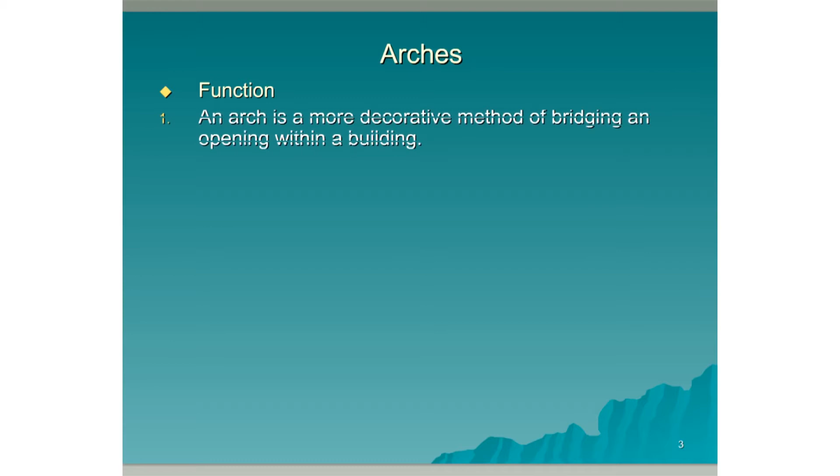Arches. What is the function of an arch? An arch is a more decorative method of bridging an opening within a building. Its function is also to support the weight above it and to visually enhance the appearance of the building.

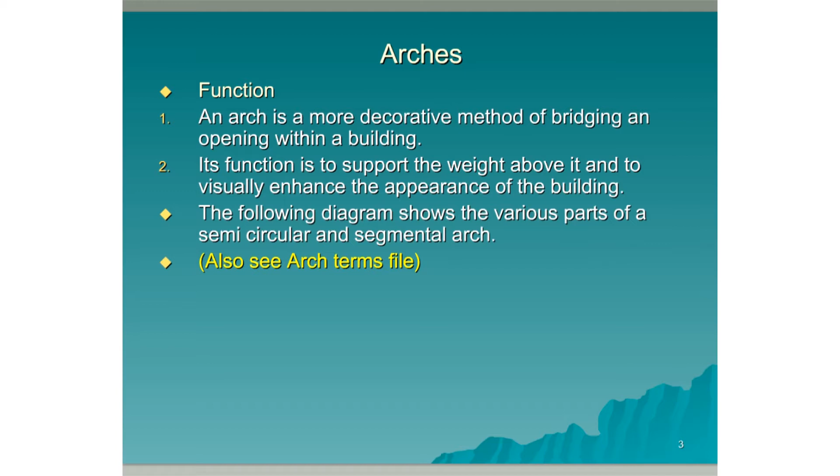The following diagram shows the various parts of a semicircular and segmental arch. Also see the arch terms file, which will help you learn all of the 17 arch terms and their definitions. The things that all arches have in common are the parts that make up the arch. These are called the arch terms. No matter what arch we're talking about, the terms stay the same. Now I'm going to talk you through the 17 arch terms.

A is the skew back. It is the sloping surface against which the springers of some arches rest. B is the key brick, the central brick in the arch face, always placed last. C is the springing line, a horizontal line drawn between the 2 springing points. D is the striking or summering point, the centre point of the circle of which the curve of the arch is a part.

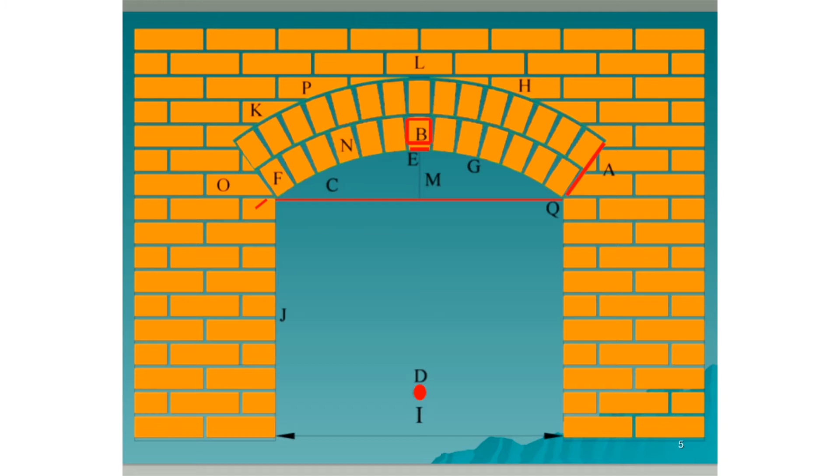E is the soffit, the underside of the arch. F are the springers, the lowest voussoirs on either side of the arch. G is the intrados, the inner or bottom curve of the arch. H is the extrados, the external or top curve of the arch.

I is the span of the arch, the distance between the 2 abutments. J are the abutments, the brickwork on either side supporting the arch. K is the haunch, the lower third of the arch. L is the crown, the highest point on the extrados. M is the rise, the vertical distance between the springing line and the soffit of the arch.

N are the voussoirs, the bricks that make up the arch. O is the face depth, the dimension between the extrados and the intrados. P are the creepers, the cut bricks around the extrados. Q is the springing point, the lowest point where the curve begins.

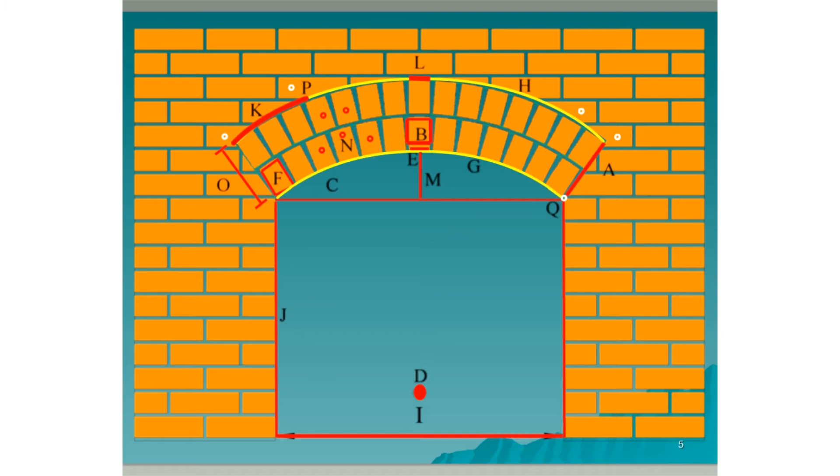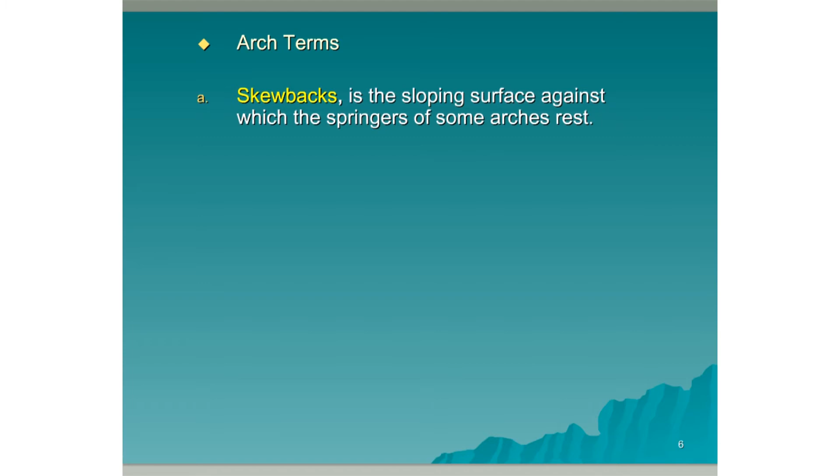Now I'm going to read through the arch terms again. A. Skew back is the sloping surface against which the springers of some arches rest. B. The key brick, the central brick in the arch face, always placed last. C. Springing line, a horizontal line drawn between the 2 springing points. D. Striking or summering point, the centre point of the circle of which the curve of the arch is a part.

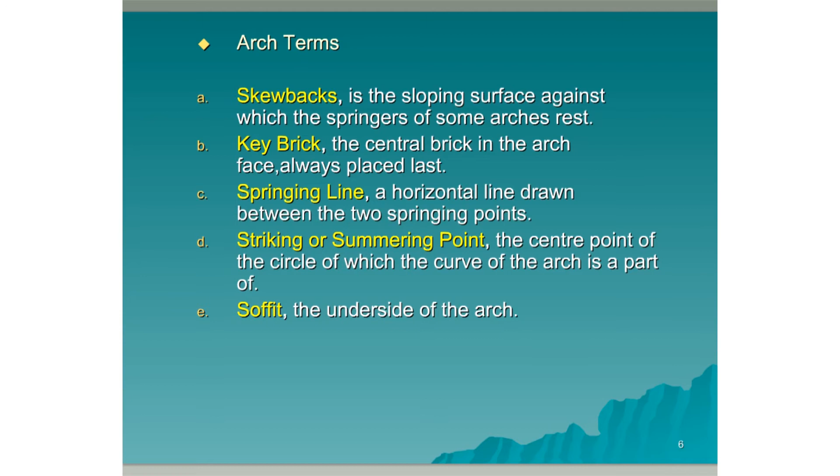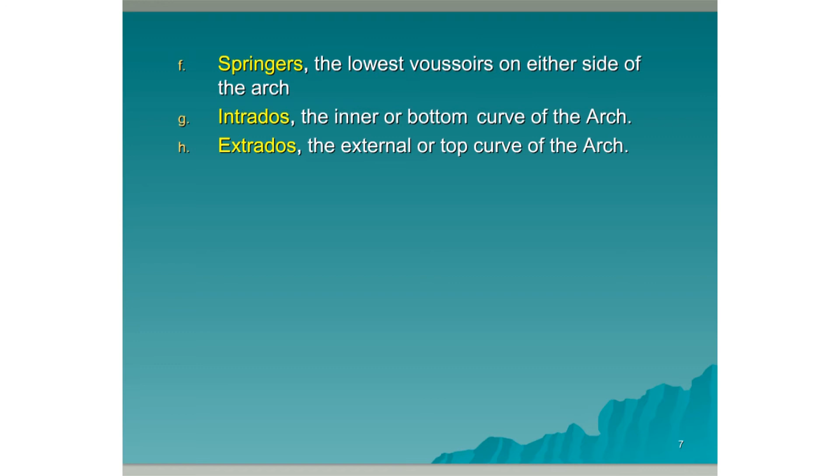E. The soffit, the underside of the arch. F. The springers, the lowest voussoirs on either side of the arch. G. The intrados, the inner or bottom curve of the arch. H is the extrados, the external or top curve of the arch. I is the span, the distance between the abutments.

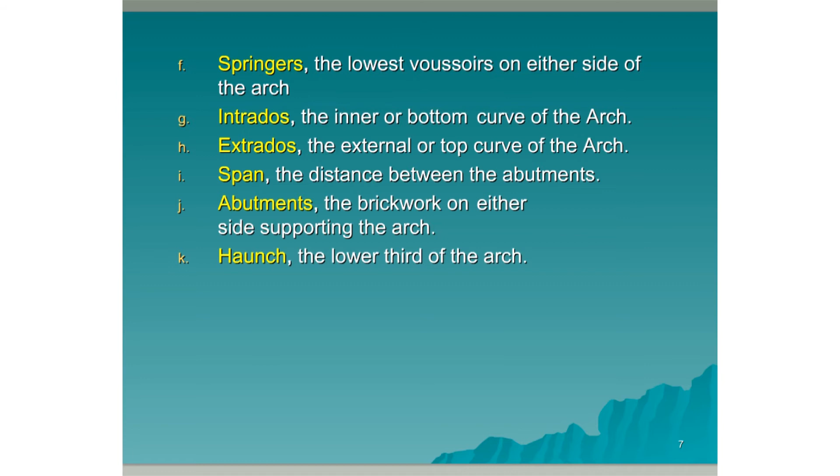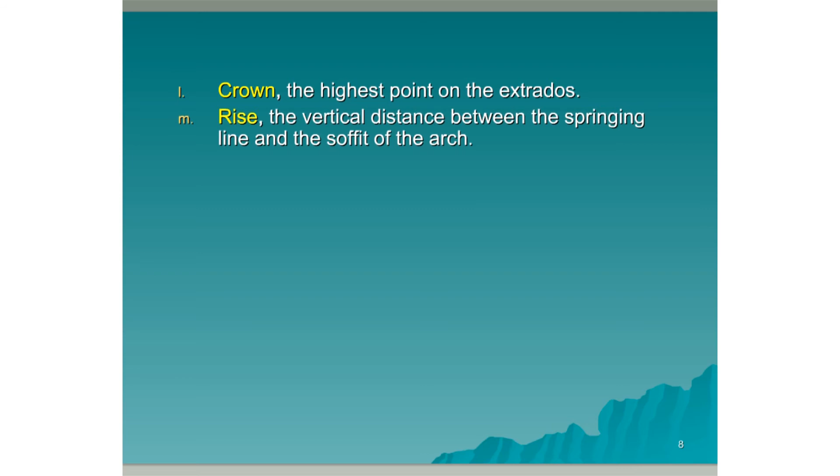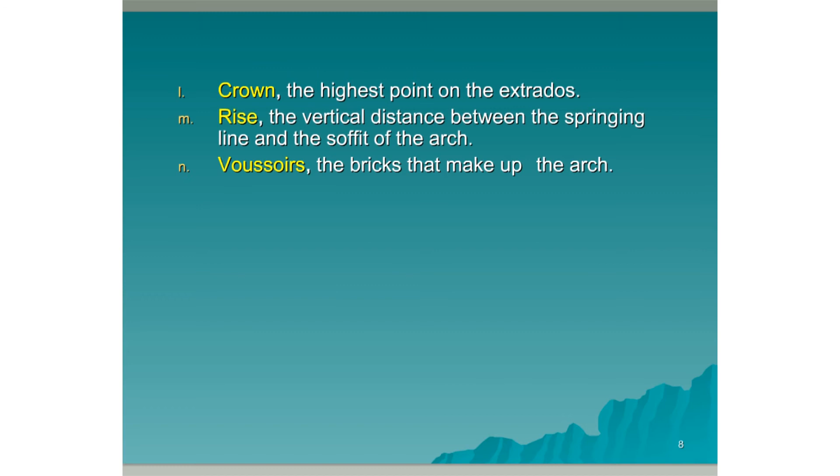J are the abutments, the brickwork on either side supporting the arch. K is the haunch, the lower third of the arch. L is the crown, the highest point on the extrados. M is the rise, the vertical distance between the springing line and the soffit of the arch. N are the voussoirs, the bricks that make up the arch. O is the face depth, the dimension between the extrados and the intrados.

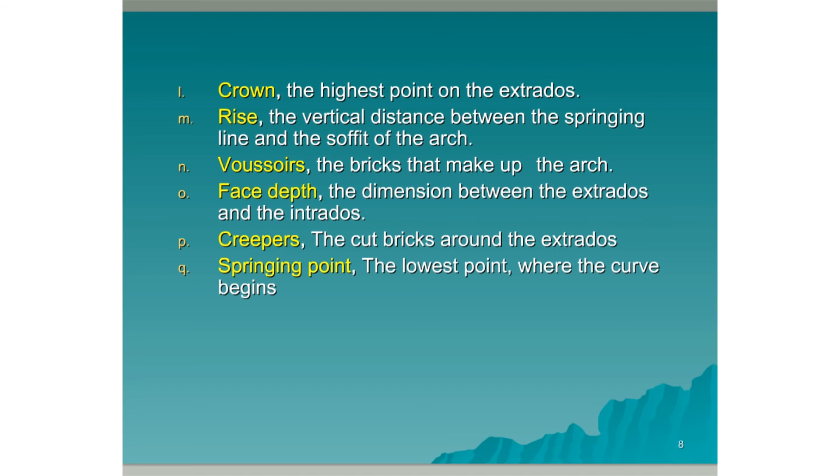P are the creepers, the cut bricks around the extrados. Q is the springing point, the lowest point where the curve of the arch begins.

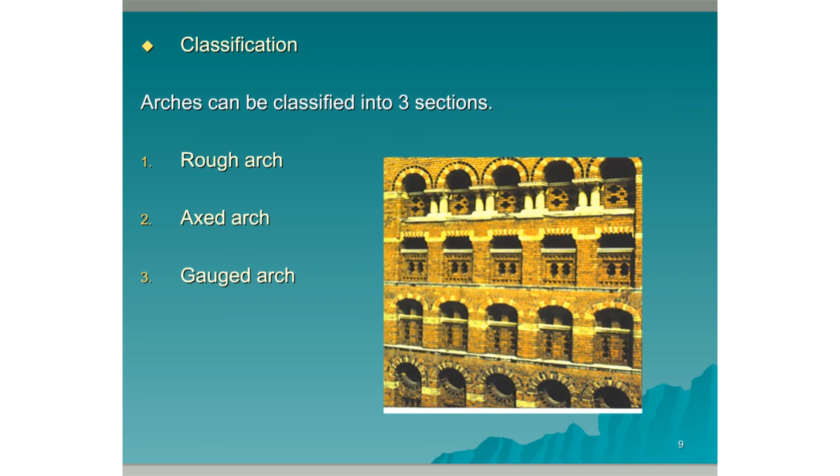Classification. Arches can be classified into 3 sections: rough arch, axed arch, and gauged arch. Rough arch: these are arches constructed from uncut bricks. It usually has 2 or more rings, and the curve of the arch is obtained by wedge shaping or V-shaping the joints. The thin end of the joint is at the intrados end. There must be an odd number of bricks in the first ring of this arch to allow for a key brick.

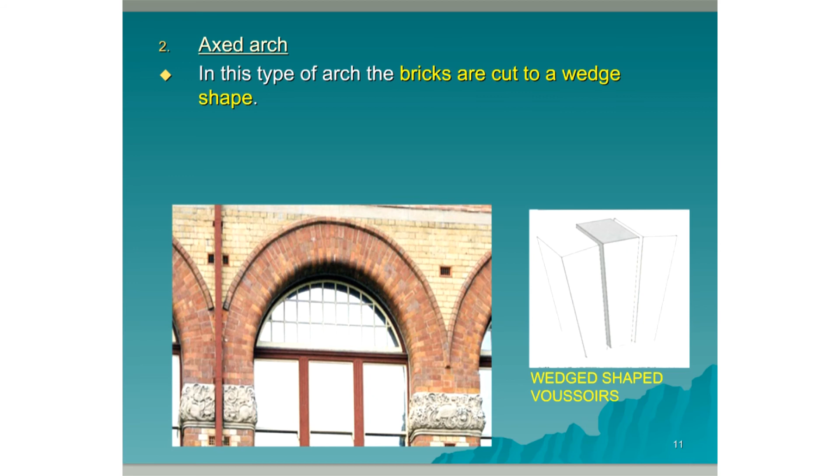Axed arch. In this type of arch, the bricks are cut to a wedge shape. The joints are kept parallel and are approximately 8 to 10 millimeters in size. There must be a key brick in this arch.

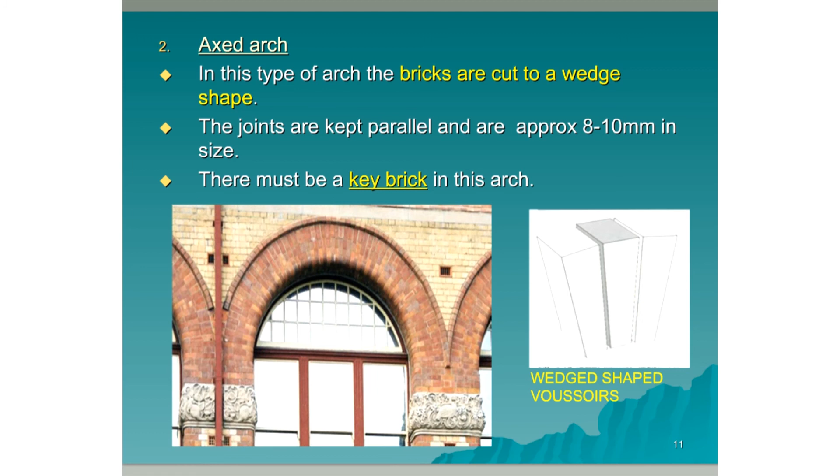Gauged arch. In this type of arch, the bricks are also cut to a wedge shape, but then they are rubbed or filed to the exact shape with a Carborundum stone. Carborundum stones are made from silicon and carbon. The voussoirs are then set in a lime putty with joints of 3 millimeters. There must be a key brick in this arch.

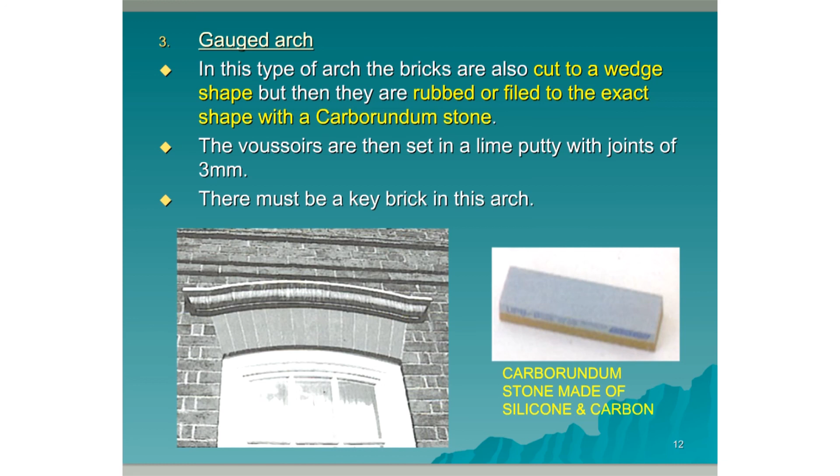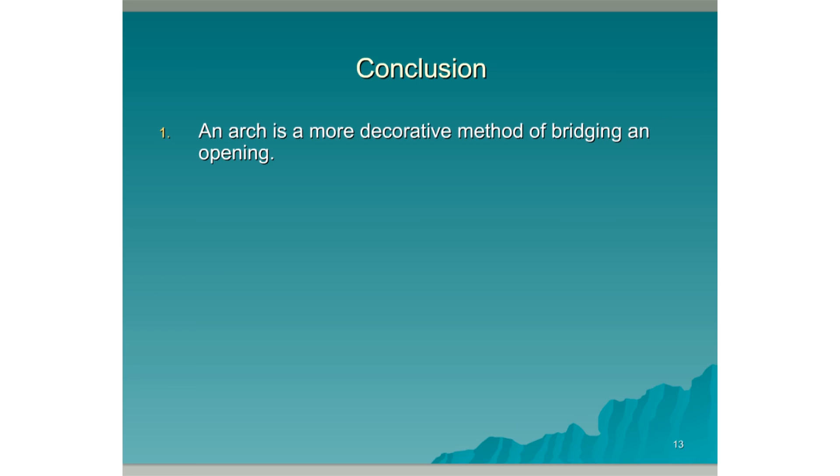Conclusion. An arch is a more decorative method of bridging an opening. There are 17 arch terms and you must know all of them. See the arch terms file to help you learn all of the arch terms and their definitions.

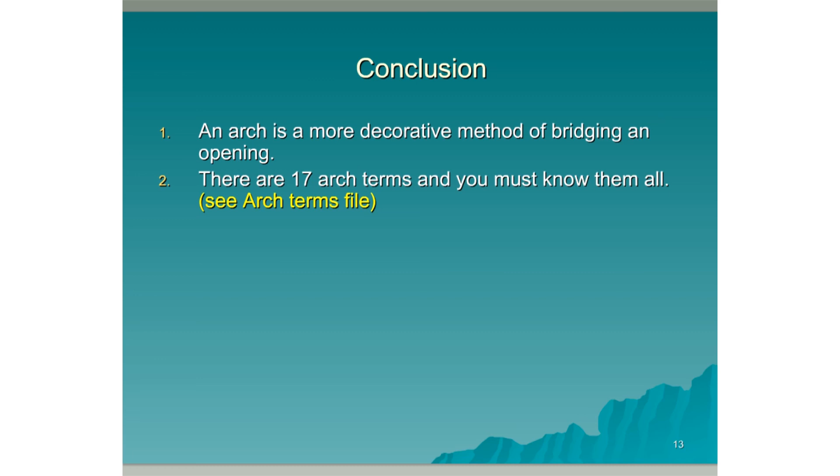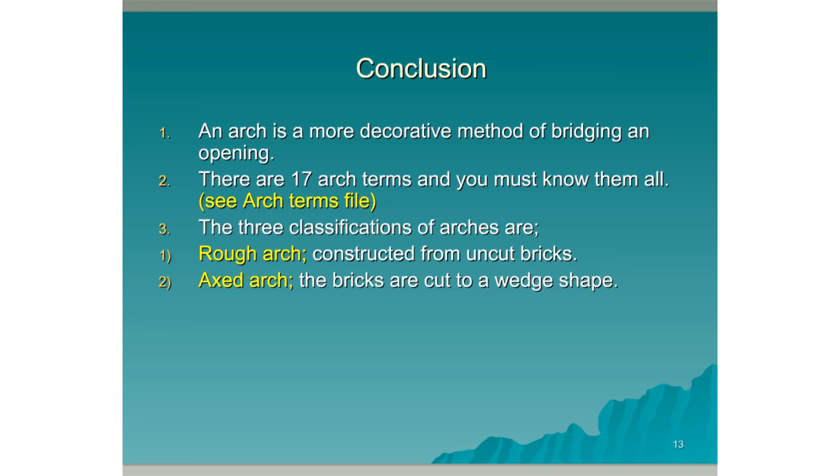The 3 classifications of arches are: a rough arch, which is constructed from uncut bricks; an axed arch, where the bricks are cut to a wedge shape; and a gauged arch, where the bricks are cut to a wedge shape and then rubbed to the exact shape, with 3 millimeter joints.